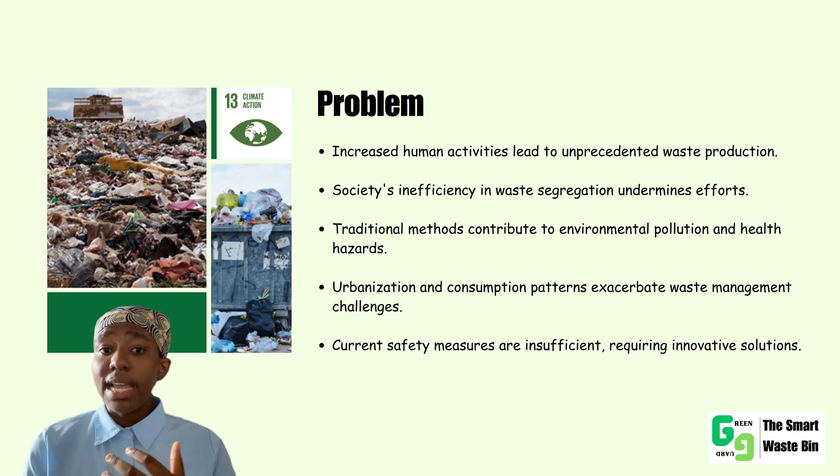Currently, safety measures are insufficient, requiring the development of innovative technologies to minimize human contact with the waste and address inefficiencies in traditional waste management processes.

Our current waste management systems are struggling due to population growth and urbanization. Traditional methods like overflowing bins and landfills harm the environment and public health. Overflowing bins are a common sight, causing unpleasant odors and dirty surroundings and attracting disease-carrying pests.

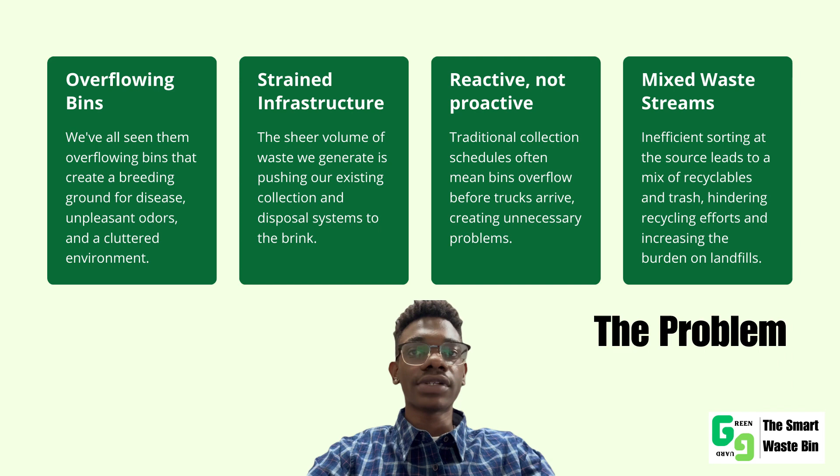Rising trash production strains existing waste management infrastructure. Traditional collection methods are reactive, leading to overflowing bins before scheduled pickups.

Traditional collection methods are inefficient. Poor sorting leads to mixed waste streams, hindering recycling and increasing landfill burdens.

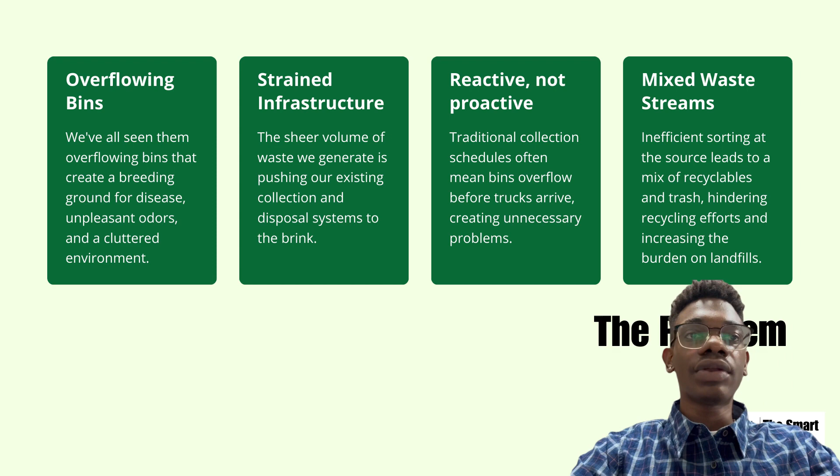The solution is smart waste bins, because smart waste bins use sensor technology, AI, and real-time data collection to improve waste management. Fill-level sensors transmit data, allowing for optimized collection routes.

This reduces unnecessary travel, lowers fuel use and emissions, and prevents overflowing bins. AI-powered smart bins analyze waste composition for automated sorting and collection. This significantly improves waste segregation and maximizes recycling rates.

GreenGuard goes beyond operational efficiency to offer significant environmental benefits, such as reduced landfill waste. By improving recycling through AI sorting, it keeps valuable resources out of landfills.

Another impact is lower emissions. By optimizing collection routes, we decrease fuel use and emissions, promoting a cleaner environment.

Our GreenGuard Smart Waste Bin project conducted a survey to understand user needs and gauge interest in its innovative waste management solution. Firstly, for demographics, primarily 61.9% were male respondents and young adults between the age group 18 to 21.

Mostly were students, providing valuable campus-specific insights. Of those, 57.1% were aware of existing programs but unclear on their effectiveness.

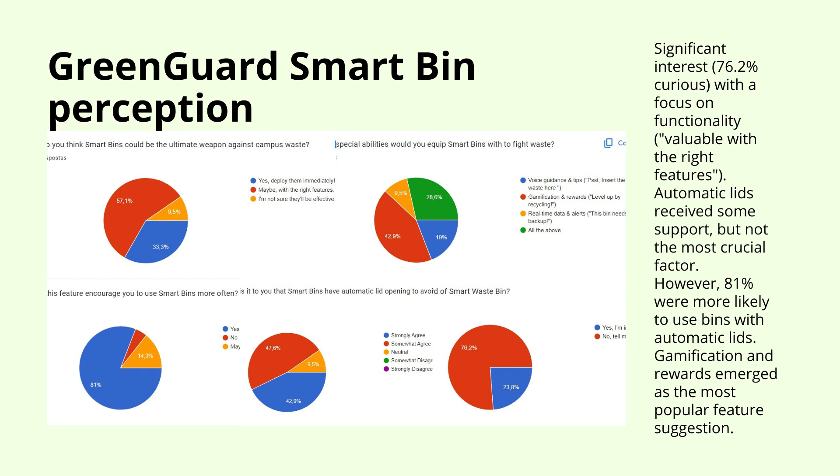Gamification and rewards emerged as the most popular feature suggestion. And lastly, for the impact on waste habits, the survey explored the potential impact on children's waste disposal habits.

A significant portion expressed a willingness to become resource champions. This suggests GreenGuard smart bins can motivate students and promote sustainable practices.

However, some respondents suggested a need for additional strategies for broader behavioral change. So, in this project, I am in charge of doing the design of our product.

So to start, I did an early sketch first of the product, and during this stage we decided the suitable shape of the bin. After a few suggestions and discussions with the group members, we decided to stick with the cylindrical shape of our recycling bin.

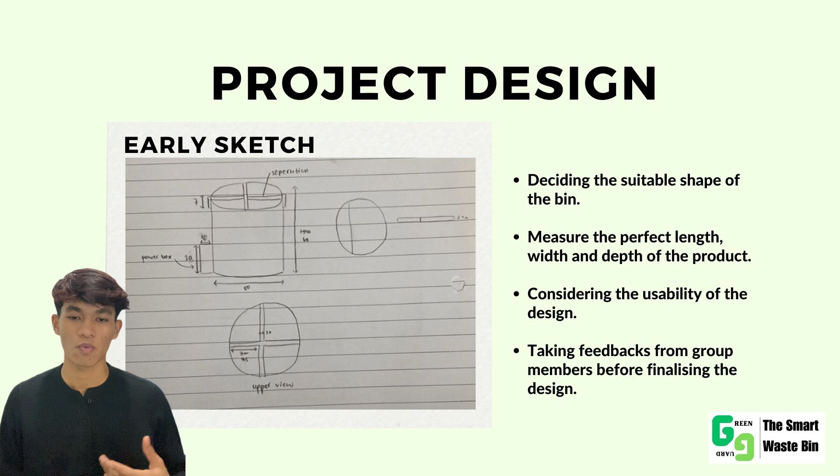Next, we determined the perfect length, width, and depth of the product. I also considered the usability of the design. Last but not least, before finalizing the design, I took some feedback from the group members to ensure the design meets the standards of our group project.

So next, after I did the early sketch, I transferred the sketch into AutoCAD. During this stage, I executed the design by referring exactly to the early sketch, and I also ensured the dimensions fit perfectly the same as the sketch.

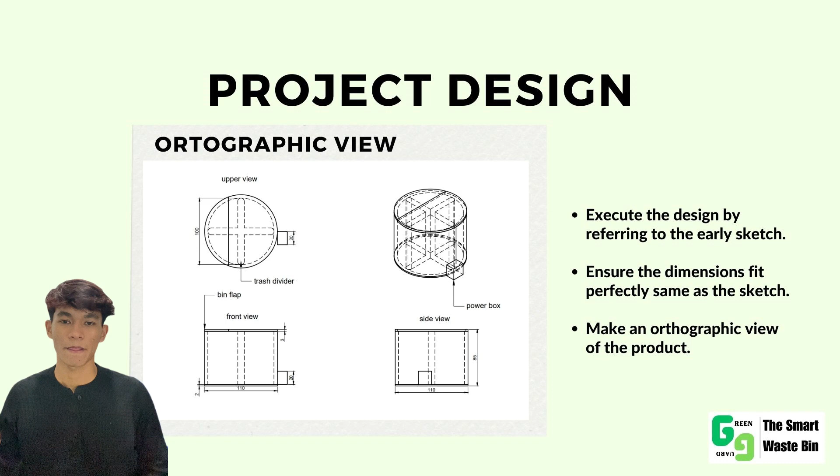And lastly, I made an orthographic view of the product. In the orthographic view, I provide the upper view, the front view, and the side view of the product, and also put the dimensions beside it. I also put some labels on it to show which is the trash divider, the bin flap, and the power box of the product.

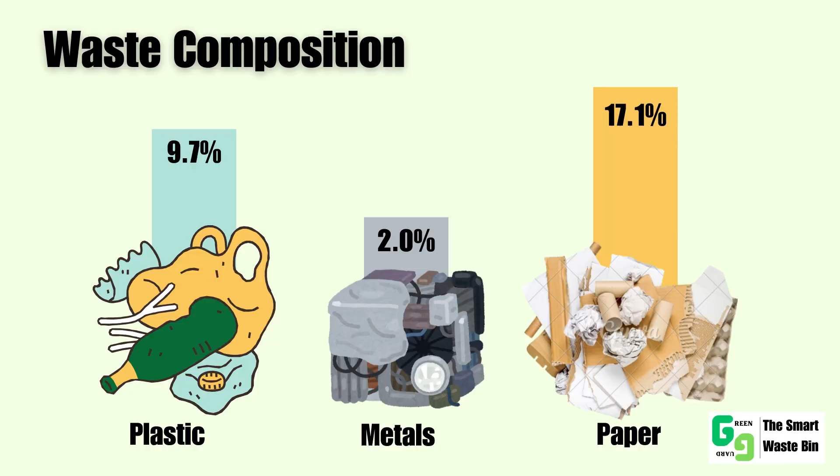According to Mohd and Manaf 2013, the three major recycling materials are metal, plastic, and paper. Thus, we decided to make GreenGuard to separate these three different types of waste.

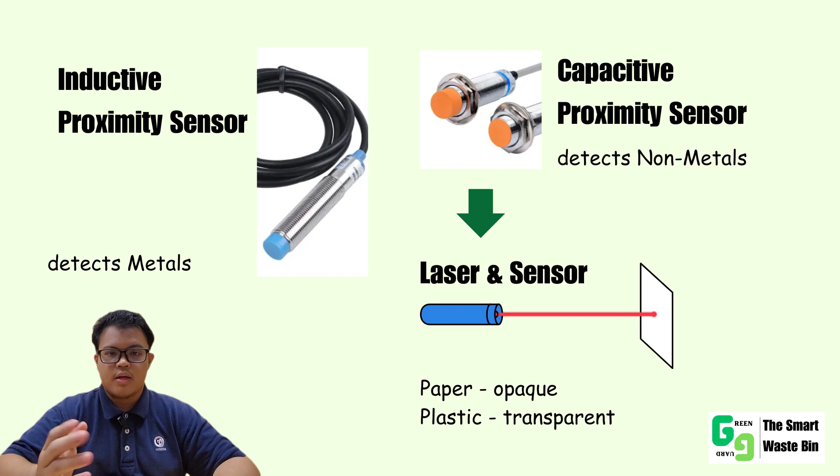First, the user will scan the object at the trash bin, then the compartment will rotate, and the lid will open so that you can throw the trash in the correct compartment. For scanning, we use an inductive proximity sensor to detect metal and a capacitive proximity sensor to detect non-metals. This is the first step of separating metals from non-metals.

For plastic and paper, we simply use a laser and a sensor. For paper, the light will not go through it, and for plastic, the light will go through it. After scanning, the lid will open automatically for you to throw the trash in.

This is because 94% of respondents say that the lid of the bin feels unhygienic, so we made it so that it automatically opens. The main thing about our GreenGuard is its gamification and reward point system.

You see, when we do something with a reward, then even if that thing is a hassle to us, we will still do it. Picture when you go to a supermarket and they give you free gifts or coupons when you spend more. Even though you're using a lot of your money, since you're getting a reward, you don't mind it.

Another example is Nike Plus, as when you wear the product, you can track its usage through an app, so you feel satisfied when you reach milestones.

So GreenGuard will use the same concept: when you throw in trash, a QR code will pop up on an LED screen, and using this you can claim your reward. This is to encourage people to do recycling and to use our products more.

Now, there may be some health and safety concerns with using the GreenGuard. The two major concerns are fire hazard and the sustainability of our power source. For fire hazard, since we are using low power materials, you don't need to worry about the GreenGuard suddenly combusting into flames.

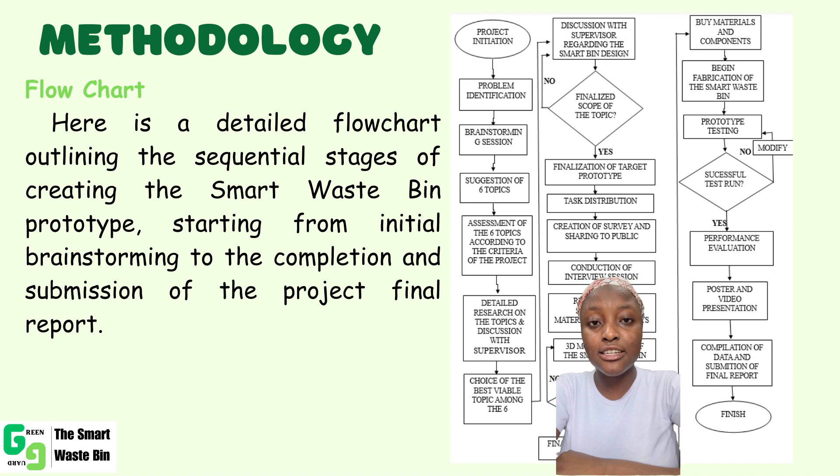This SEM, we cover from the project initiation until the submission of the proposal. For the second SEM, that is the next SEM, we'll cover the buying of materials, all the operations until the final submission of the final report.

Second, I'm going to talk about the identification of the materials and the reasons why we chose those materials. The capacitive proximity sensor that is used to detect any near object, the inductive proximity sensor detects the metallic objects, the ultrasonic sensor detects the ultrasonic waves distance, photoresistor detects the changes in light, the PIR motion sensor that detects

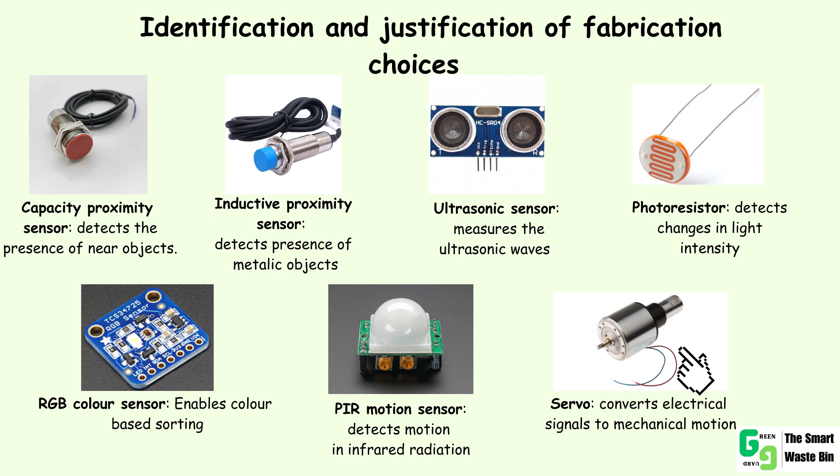the motion in infrared radiation, servo that enables the mechanical motion, ESP32 integrates the sensor data, near-infrared sensor emits the infrared light, solar panels to convert the solar energy into electricity, the lasers for the measurement of the difference, Arduino for the measurement of the waste levels, the display to display all the information, and last but not least, the coated metal bin that is going to be used as the body of the smart waste bin.

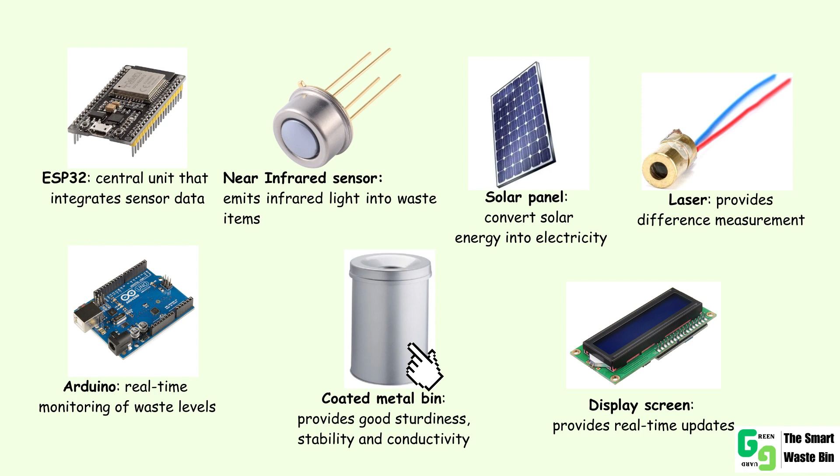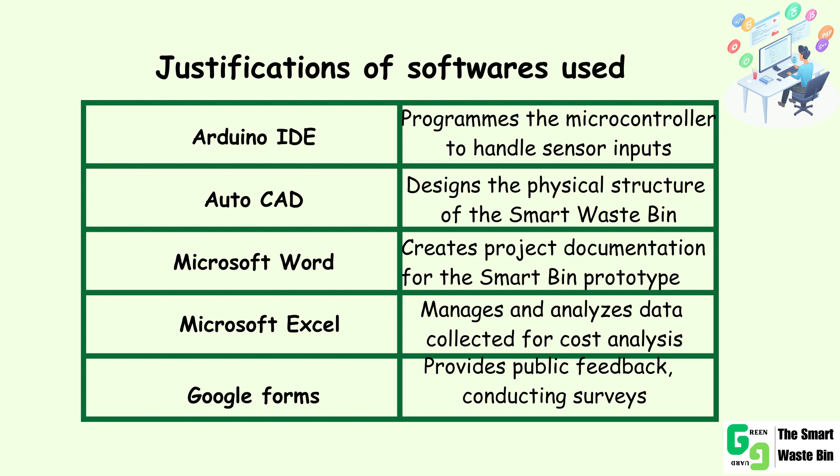Proceeding, I'm going to talk about the justification of the software used. We have the Arduino IDE that is mainly used for the coding part. We have the AutoCAD that is used to design the physical structure of the bin. We have the Microsoft Word that is used for all the documentations of the smart waste bin. We have the Microsoft Excel that is used to analyze data from the cost analysis and the budget. And finally, we have the Google Form that is used for gathering the feedback of the public.

For the final part of the methodology, I'm going to talk about the fundamental engineering analysis, in which I'm going to explain what is the engineering behind the smart waste bin. First, I'm going to talk about the electrical and electronic analysis. In this part, we calculated the current flowing through the components using Ohm's law, in which we divided the voltage by the resistance. And these are the values.

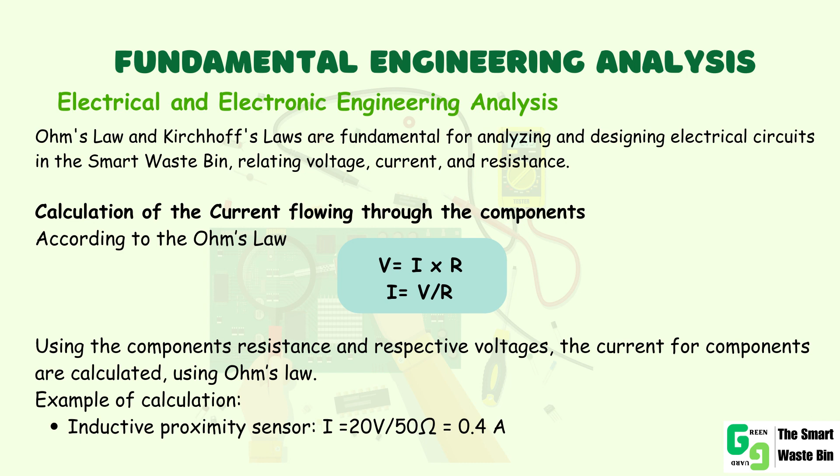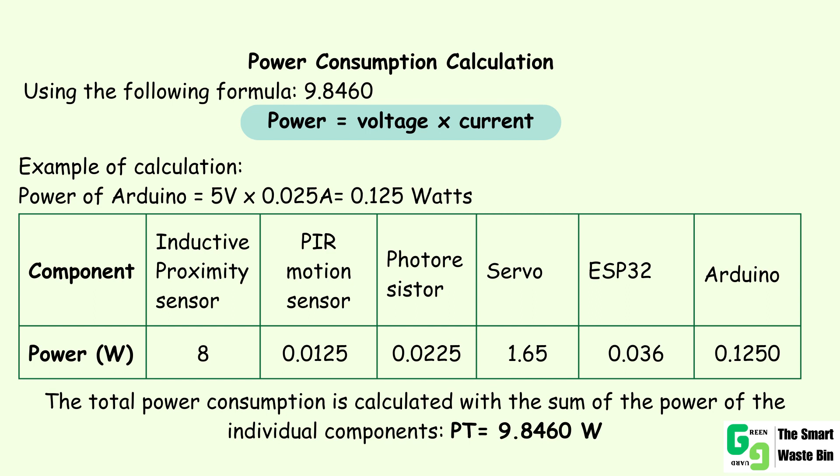After the calculation of the current flowing through the components, we use these values to calculate the power consumption of the smart waste bin. So the total power consumption of the smart bin is calculated and the value is approximately equal to 10 watts. Following the first engineering analysis, we have the second one, that is the mechanical engineering analysis.

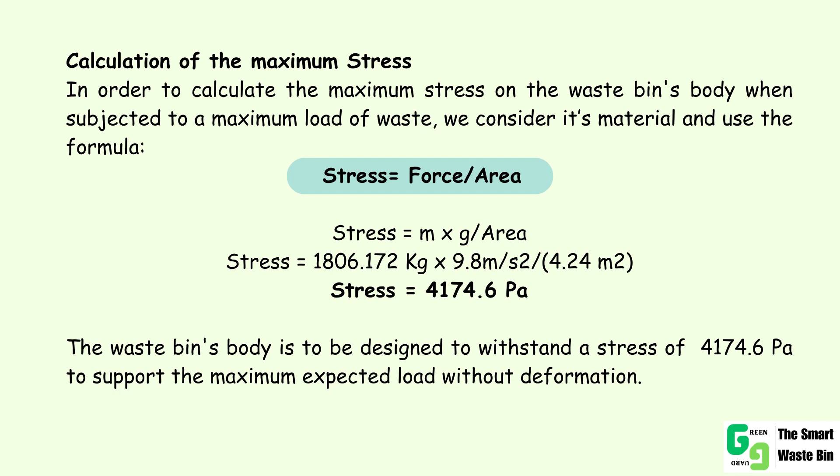In this part, we calculated the volume of the smart waste bin. That turns out to be 0.668 cubic meters. After that, we used the volume to calculate the maximum mass that can be used in the smart waste bin. Lastly, we calculated the maximum stress that the smart waste bin can support, and the value is 4,174.6 pascals. And today I will talk about the project managing, planning, and economical and business consideration.

This project was oriented and supervised by Dr. Aliyu Sulaimon, with the members that are William Benjamim, who is currently doing chemical engineering and he is our team leader, Asyraf Syazwan, who is doing electrical engineering, Adelaide Albino, and Diocleciana, who are both doing chemical engineering, Haeikal Khairi, who is doing mechanical engineering.

This project has a feasibility plan that complies with ISO standards, which adhere to applicable law, including the ISO 14001 and the ISO 9001, which addresses data protection for consumer safety and privacy. This project also evaluates the cost-benefit analysis for success determination, which was estimated to be less than or equal to 300 Malaysian ringgit, and the materials for this project may be found in hardware stores or online, for example, Lazada.

This project has an advantage of being eco-friendly and portable for the technical resources and skills. The Smart Bin is focused on two sustainable development goals, the 11th and the 12th goal. It is also an innovation that will attract a large population. This project relies on solar power energy for most energy demand, which reduces the cost and carbon footprint, and requires less maintenance on battery charging.